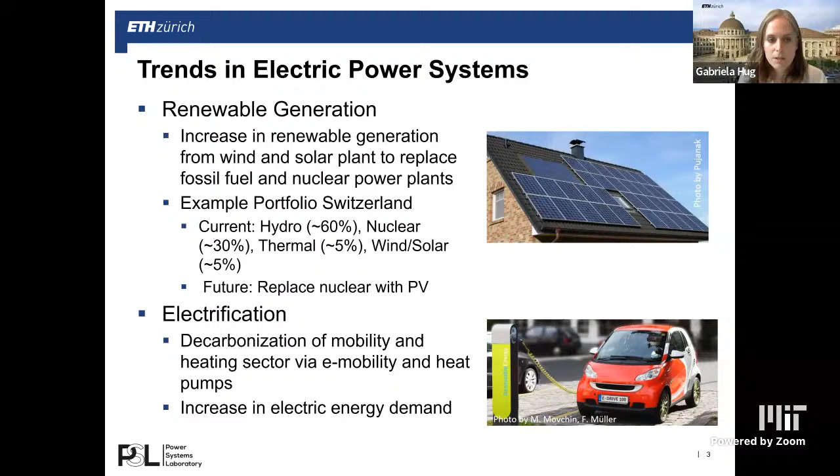Now, in terms of the characteristics of inverter-based resources, well, we're used to synchronous generators, and they have some natural physical coupling with the system due to the fact that they're rotating. Whenever we see an imbalance in load and generation, at the very initial moment, that difference is covered by the kinetic energy, and that has some impact on the frequency. So we see this inertial response, and control loops are used to replace the inertial response.

Whereas in inverter-based resources, we don't have that actual natural coupling with the grid anymore, but this is via power electronics. This has the disadvantage that we don't have this natural coupling, which helps to reduce the speed of the system dynamics. So it's actually a drawback.

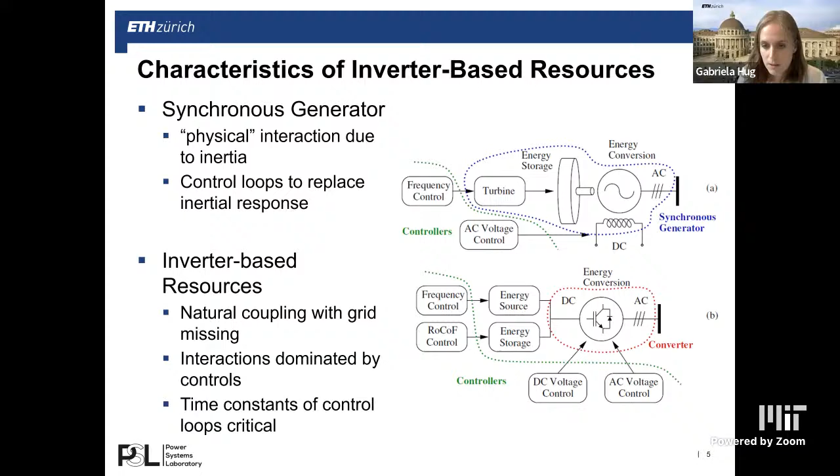On the other hand, inverters can also be controlled more freely, so we have a higher degree of freedom, and therefore can also design the controls a bit differently. So the interactions in that case are dominated by the controls. And in that case, actually time constants of the control loops and how they're designed becomes critical, but the time constants are not going to be the focus of this talk.

In terms of system reaction, if we decrease the inertia, which is reflected in M—and here I'm talking about the natural inertia, not imposing any specific controls for the inverters—then we do expect to see an increase in the rate of change of frequency, so faster system dynamics, and also an increase in the nadir, which is the minimum or maximum frequency deviation.

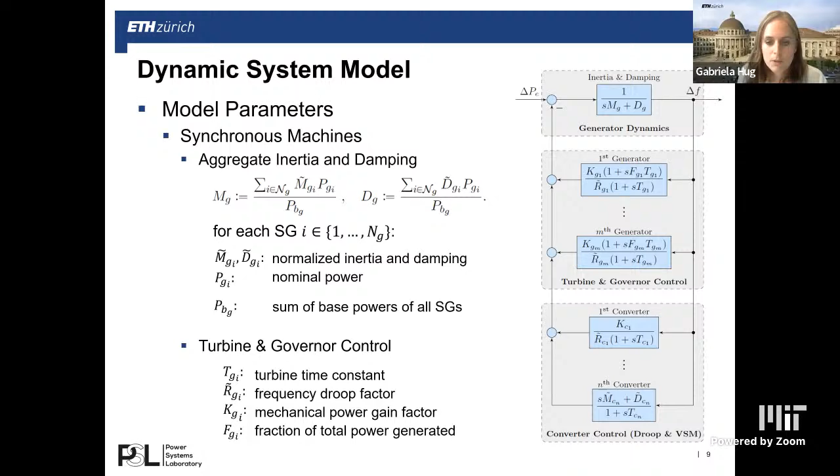Now, if we're adding converters to the system, we can distinguish between the ones that actually have an impact on frequency, or grid forming converters, versus just grid following. The ones that are grid forming, we're looking at droop and virtual synchronous machine control.

So droop is a standard droop control, and VSM corresponds to enabling or using the power electronics in a way that we control it so that it behaves similar to a synchronous machine. And that's what we have on the bottom.

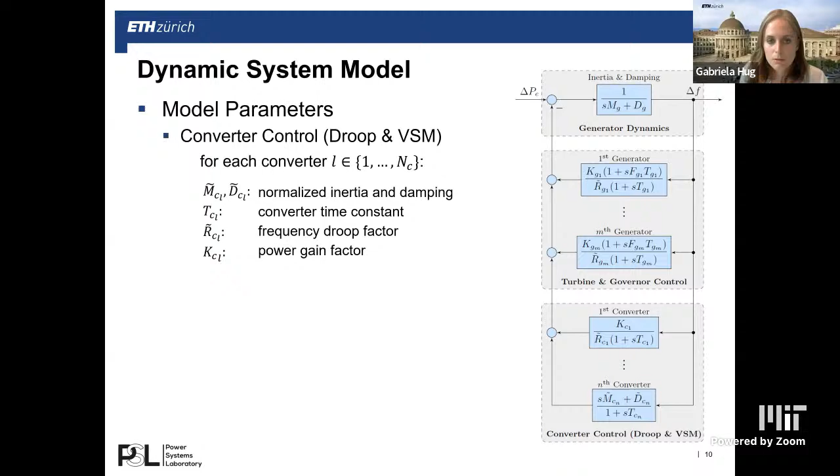So we have converters that have droop control, where we have some gain factor, speed droop, and the time constants of the converter. And other converters include those which are controlled via virtual synchronous machine approaches.

Now, having this entire model, what we can do is derive a general transfer function. I'm not going to go through the details here, but we can basically add up all of these terms and then get a relationship between the frequency and any imbalance in the system.

In order to simplify this transfer function, we're going to assume that the generators all have a similar time constant, so we set TGI equal to T. We also assume that the time constants for the generators are significantly larger than for the converters, so we set TC equal to 0. Doing that, we can derive this function you're seeing here in red as the transfer function.

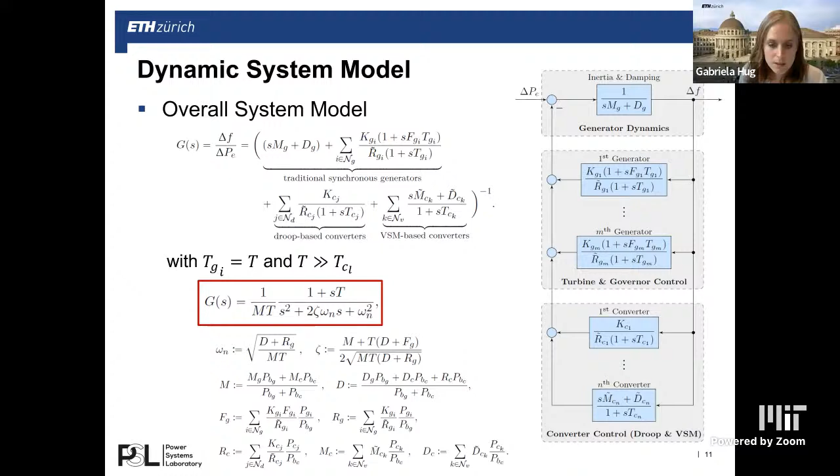We're using that in the following to derive some constraints. It's not for the purpose of simulating the actual system and running simulations. What's becoming clear from all of these terms defined here is that the inertia constants, the damping factors, and all of the parameters I was showing before have some impact on the behavior of the system, and we can influence it by choosing the control parameters.

So we will leverage this function now for deriving a function that gives us, in the time domain, the frequency evolution given a certain step function in terms of power imbalance. That's what we have at the top here, again without providing too many details.

Having this function now as a function of time, given a certain step in delta P electric, we can also derive the frequency nadir. How are we doing this? Well, we can take the derivative of this very first function, set it equal to 0, and identify at which time instances t that derivative is equal to 0. That tells us when we reach the minimum or maximum value.

We have multiple ones because we have an oscillating system, so we have more extrema. The first one would then be the frequency nadir, and we can plug that into this function. With that, we have maybe a somewhat complicated expression for the frequency nadir, but we have an analytic expression.

In terms of RoCoF, what we can model it as is taking the derivative again of this function, and then plugging t equal to 0 in, because that's when we're going to see the maximum rate of change of frequency. And then we can also derive the steady state frequency deviation.

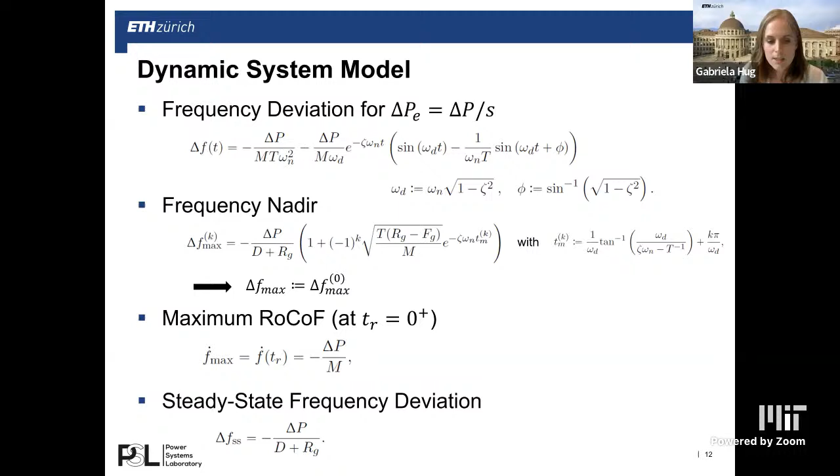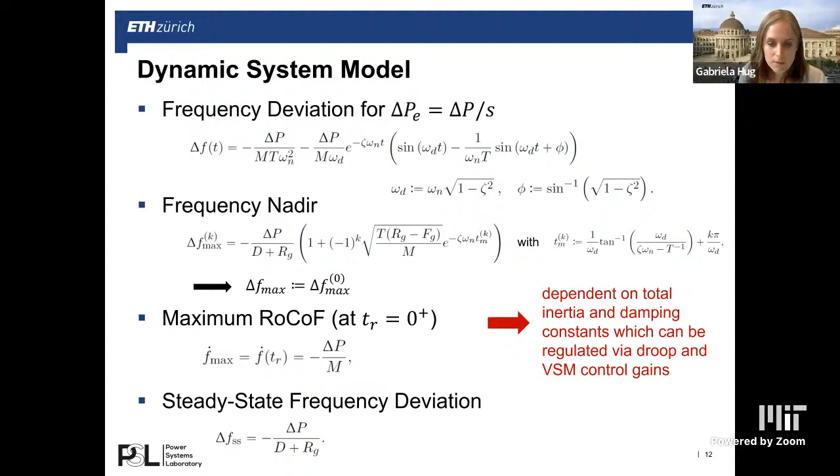So we now have these equations, and what becomes clear looking at these expressions is that it's dependent on the total inertia and damping constants, which can be regulated or influenced via the droop and the VSM control gains. Having now introduced these equations, which I will come back to a little bit later, we can now look at unit commitment in low inertia systems.

The point that I want to make with this part of the work is that we can include constraints on frequency measures, and other people have also been working on this. How can we include frequency constraints in the unit commitment problem?

Why is this important? Because if we do have an increased level of inverter-based resources in the system, then we need to make sure that we still have an acceptable frequency in the system, in terms of limiting the RoCoF, the nadir, and the steady state frequency deviation, given a specific step change.

So we have these functions that I've been using or deriving previously, and what we now want to do is include that in a unit commitment problem. Now, introducing these adds quite a lot of complexity.

So what we can do to simplify the frequency nadir equation is use a so-called bound extraction mechanism, which transforms the first constraint into simplified limitations on the different parameters that we have in the system.

How we do this is we're just running all possible combinations in terms of unit commitment after a particular generation outage, and then identify for which combinations the nadir is violated. From that, we can identify these limitations, so we include these constraints in a unit commitment problem.

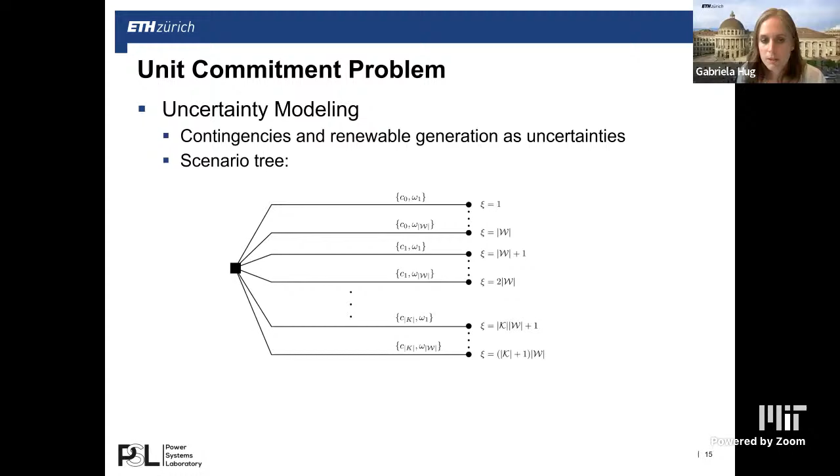Uncertainties come from contingencies, so generation outages—we're excluding line outages—and renewable generation as uncertainties. We're modeling this with a scenario tree, and each scenario has a specific contingency and a specific scenario of wind power output, could also be solar, but here it's wind power. I'm not going to talk about how we decide on these wind scenarios; you can use reduction techniques to get representative wind scenarios.

So how do we do the problem formulation? The objective function includes minimization of day-ahead energy and real-time balancing cost. Day-ahead energy costs include startup cost, shutdown cost of generators, the actual power output cost, and for each scenario, the required reserves needed to balance the system. In the worst case, we have some load shedding.

The constraints are the nodal power balance, including the deviations for each scenario—so a power balance for each of the scenarios—line flow constraints, ramping constraints, power limits, startup and shutdown constraints, and minimum online and offline times for the synchronous generators. Then as an additional part, limits on RoCoF, frequency nadir, and steady state frequency deviation, reflecting the frequency nadir with specific limits on the overall parameters of the system.

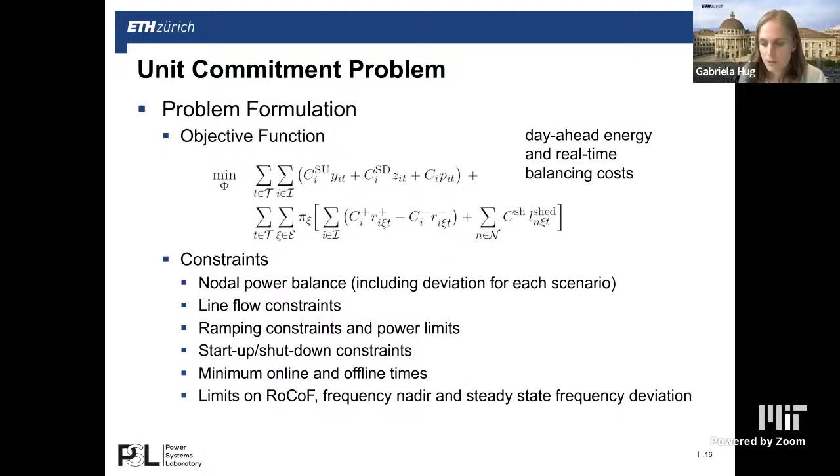We can look at some simulations. We've been working with a modified RTS 96 bus system, specifically looking at contingencies, namely failures of generators at 4 different—I think it was actually 5 different buses, I think I forgot one—looking at these types of contingencies at a particular hour.

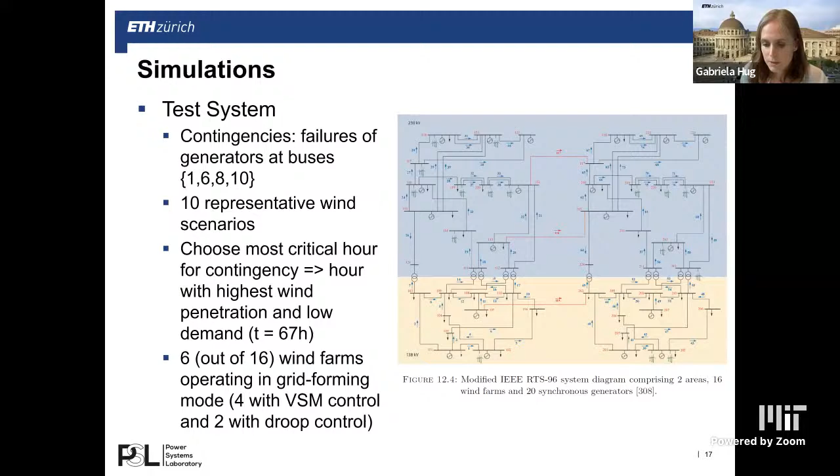We're assuming we're taking into account the worst case, which is the highest wind penetration and low demand in our system—we'll see that at hour 67. We have 10 representative wind scenarios, which multiplies with the number of contingencies to get the overall scenario count. 6 out of the total 16 wind farms are assumed to operate in grid forming mode, 4 with virtual synchronous machine control and 2 with droop control. The parameters are tuned and given in the unit commitment problem.

So let's look at the results. What you're seeing here is the output from the optimization problem, the power output: first in black, the load; in blue, the wind generation; in yellow, the output from the synchronous machines without including the frequency constraints; and in red, including the frequency constraints.

In terms of total generation output from the synchronous machines, there's not too much difference—actually we don't see much difference except where it's zoomed in. That difference in generation output is made up by curtailment from wind generation, which isn't shown in this figure. However, if you look at which generation resources are committed and how many, and what they're producing, that changes significantly whether we include the frequency constraints or not.

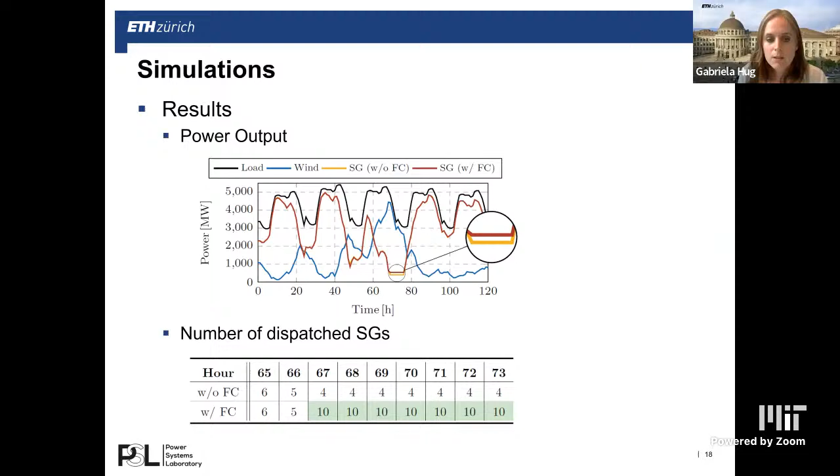On the bottom, you see the number of dispatched synchronous generators, which for this simple system changes significantly. With frequency constraints, we have many more units committed that all have to operate at their minimum power output, and the other generators have to scale down a bit in terms of power output to compensate. But they are really just present to make sure that if one of these contingencies happens at hour 67, the frequency constraints can be fulfilled.

We can now look at what that looks like if we indeed have a disturbance—can't remember which outage it actually is, one of these generator outages—and what happens depending on the committed units. We can see that with the frequency constraint, we're keeping the nadir as well as RoCoF limited compared to if we do not include the frequency constraints.

We can also look at the costs, evaluating and showing it for day 3, because the first 2 days there's quite a lot of startup and shutdown costs since the system first needs to initialize. Looking at the costs on day 3, where we also include these contingencies, we see a significant increase in costs, particularly in percentage terms of the startup cost, because we need to start up more units, and also in terms of the reserves needed to keep the frequencies within the limitations.

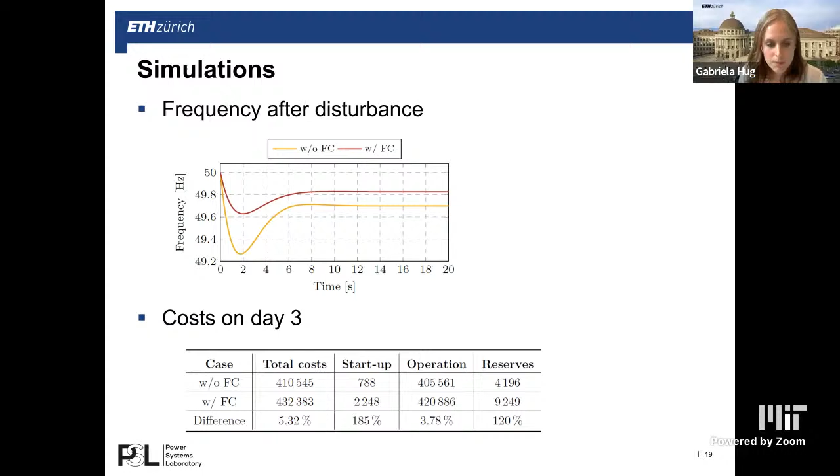So this is just a toy system, and I think it's food for thought about what it means if we also have to take into account that the frequency behavior changes significantly if we have more inverter-based resources in the system. So with that, I'm coming to the second part.

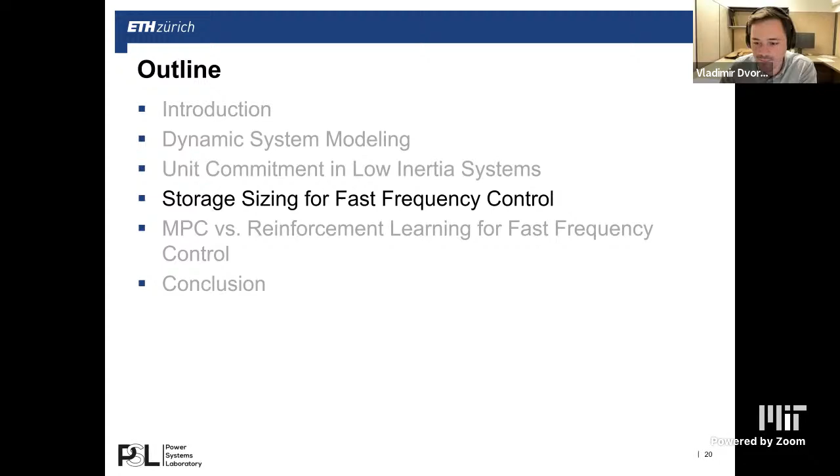Now, the second topic focuses on storage sizing for fast frequency control. The problem statement here is that we can use batteries for fast frequency control. However, they have limitations on power as well as energy capacity. Usually one assumes, well, I have a specific battery with specific power and energy capacity, and then I look at how do I do the controls for that battery.

What we want to do in this project, which was actually a master's thesis project advised by a PhD student, is to compute the minimum storage capacity sufficient for providing adequate frequency support in low inertia systems. So we're including constraints on the frequency to determine what is the minimum power and energy capacity that need to be put in place for the storage.

Now, the storage is interfaced to the grid through a fully controllable VSC, and we're assuming that we're employing a virtual synchronous machine control scheme. So when we're doing the optimization for the design of the storage device, we also include the VSM parameters as optimization variables. We're determining the M and the D, virtual inertia and virtual damping of the virtual synchronous machine scheme. We also assume that the storage device has a given power to energy ratio, eta.

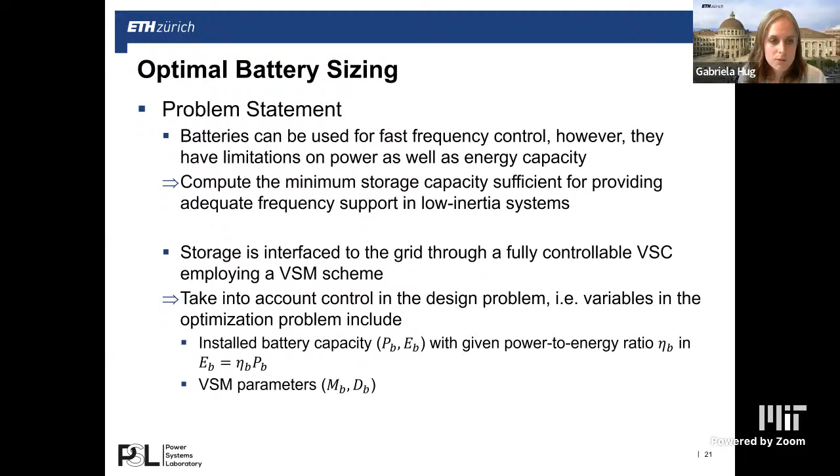So we only need to determine one of these, and then the other one is given, but of course both show up in the optimization problem.

Now, just as a reminder and some preliminaries, we work with these equations that I've been showing earlier to include them in the optimization problem. What we're seeing from these constraints is that they are dependent on the aggregate damping and inertia, and we have impact on this via the tuning of the storage device.

So if we're looking at the system, what could happen is if we end up with an overdamped system, then we end up with omega D that is complex, and then having a time which is complex. So that doesn't really make sense. So we're going to make the assumption that we want to have an underdamped situation, so that Tm is greater than 0 and omega D is a real value, so that we actually do have a frequency nadir that we can compute.

So we enforce that the overall system damping, zeta, is smaller than 1, and we have an expression for that from one of the earlier slides, and that the time instance of the nadir has to be greater than 0. From this, without giving full details, from each of these constraints, we can derive a specific constraint on the aggregate damping D as a function of the aggregate inertia M. So we end up with expressions like this: the Tm greater than 0 leads to a lower bound, and zeta to an upper bound.

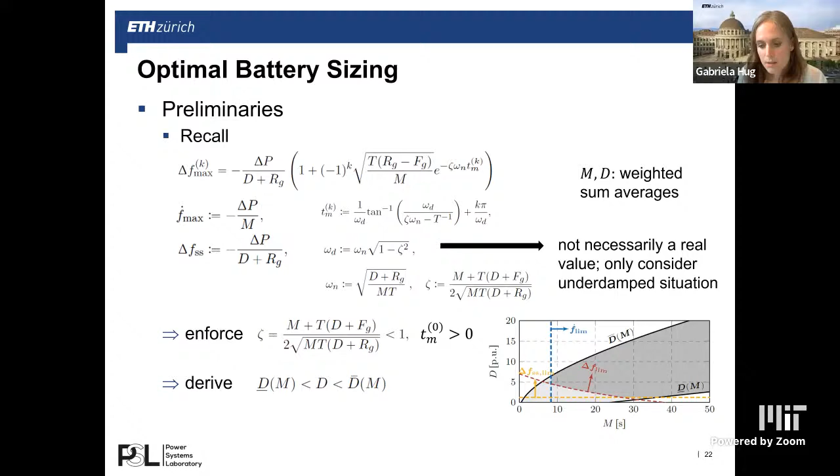So then let's look at the optimization problem. I want to minimize the required storage, minimizing the cost of the storage. I have constraints on the frequency as a function of system parameters and disturbance. So what you see on the left, delta F max, is actually a function of the system parameters and the disturbance, as I was showing on the previous slide.

Then additionally, I include these limitations here to ensure that we do have valid values for D and M. Then I have some non-negativity constraints, such as that M, which is a tuning parameter — the virtual inertia of the battery — is greater than 0. And then I also have some power constraint on the battery. This is derived from the virtual swing equation, because we're operating the storage as a virtual synchronous machine.

So we have some limitations on the power, which gives us the minimum amount of power capacity that we need. And then also an energy constraint, so we integrate this power over time until steady state, and that gives us the energy value. As I said, we're enforcing a fixed relationship between the energy and the power, and we can vary this eta value for sensitivity analysis.

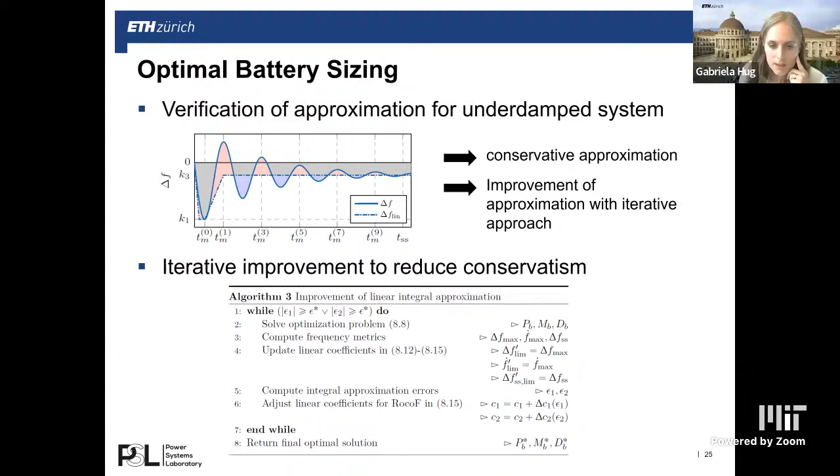And we can do this in an iterative way. So then let's look at some simulations.

We have a test system with one synchronous generator and five converters, assuming grid-following mode. The only grid-forming is from the storage device, placed with one of the inverters. The inputs are the maximum disturbance we expect, the power-to-energy ratio, and the speed droop of the one synchronous machine.

Again, this is a toy system just to understand the relationships and the implications of the different assumptions. There's quite a lot of results shown in this graph here. I am not going to go into details.

What I want to illustrate is that the inputs heavily impact the nature of the problem. So if we look at the maximum power, what is the maximum disturbance, what is the speed droop of the synchronous machine in the system, that can lead to a problem that is too relaxed, so the synchronous machine can basically do the job, or a problem which is infeasible, or different constraints become binding.

This figure shows when which constraint becomes binding. Again, the main point here is really that the inputs heavily impact the nature of the problem, therefore also the solution.

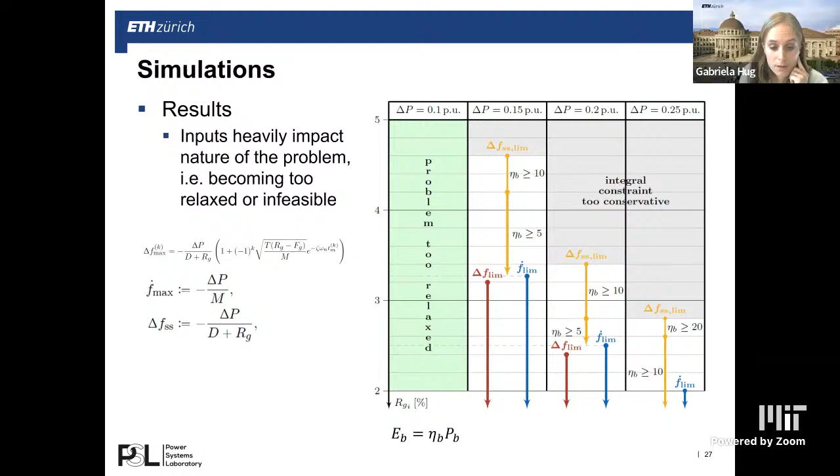Then let's look at the specific case, namely delta P of 620 megawatts, which is of course a large change, but again, we just want to study the implications of the result from the optimization problem.

We're assuming two different speed droop values, 2.6% and 4.6%. And then what we run the simulation with is without the iterative improvement, where we have some inaccuracies in the estimation of the energy content, and with the iterative improvement.

What you see here are the inputs. So eta is the input, and the speed droops are an input. What we can see is that for R equal to 4.6%, there's a noticeable threshold in eta after which the additional energy capacity does not contribute anything anymore. So it's really the P which is becoming the binding term.

And in fact, because we're talking about fast frequency control, only very limited energy is in fact needed. So what I also want to point out is if we use the iterative improvement, going from the left to the right-hand side, particularly in the case of 4.6% for the speed droop, we see a clear difference.

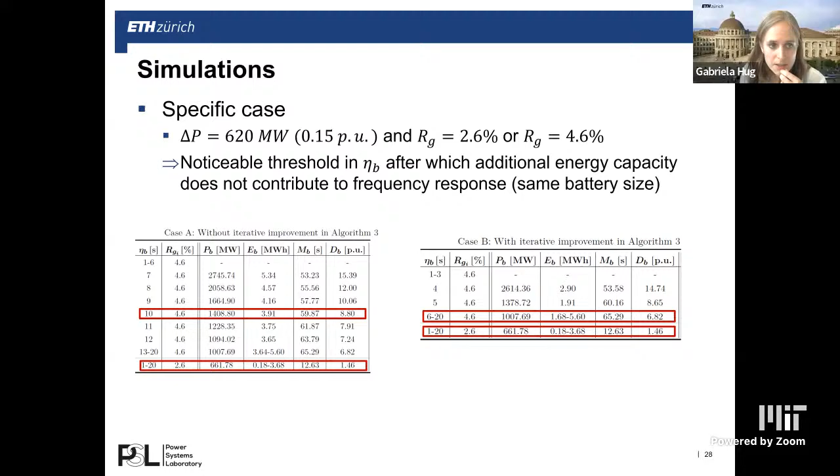Specifically, we look at a scenario where we have the speed droop equal to 4.6%, eta being 10 seconds. Again, we're talking about very small storage amounts. And then the R equal to 2.6% and eta equal to 15 seconds. The results are shown on the right-hand side.

So in the first scenario, if we look at the frequency behavior over time, we see that the integral approximation is very conservative because the limiting factor in this case is the steady state frequency constraint.

Whereas in the second scenario, which is the one with R equal to 2.6%, the nadir and RoCoF impose tight constraints, and the integral approximation is in that case less conservative, and we don't need the iterative approach to improve the storage sizing.

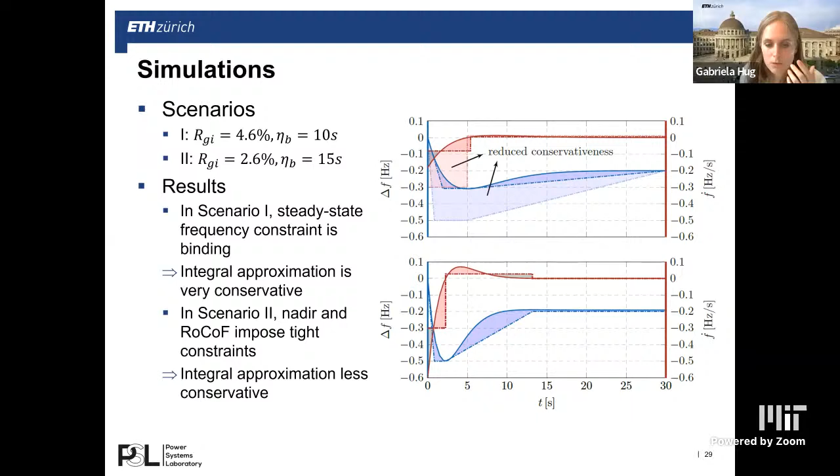So with that, I'm already coming to the last part, which is switching gears a little bit into a different time scale. We're still talking about fast frequency control, but now really looking at how we could do the control design for fast frequency control.

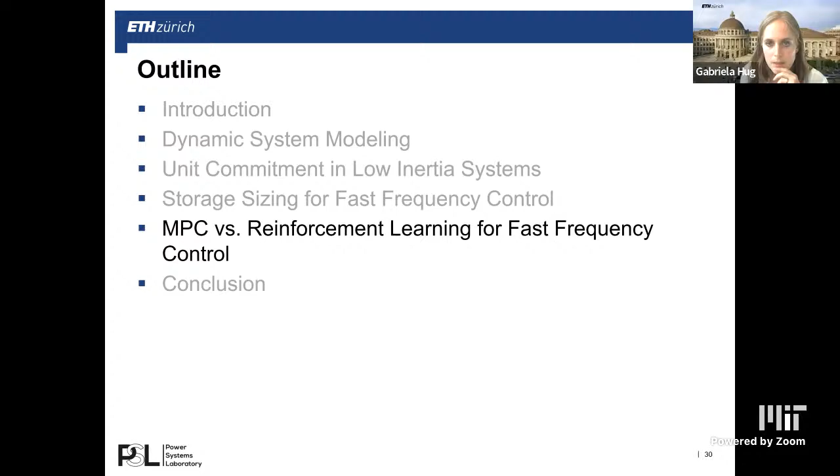So what do I mean with fast frequency control or fast frequency reserves? Well, we know that initially we're going to have the inertial response from the synchronous machines. And then once we have some frequency deviation, primary frequency control kicks in.

But before that, we could have fast frequency control given from some inverter-based resources because they're capable of acting very quickly. And we now want to use grid-forming inverter-based resources for such fast frequency reserves, but we want to only use it in emergency cases. I will show in a minute what I mean with this, or how we're setting it up.

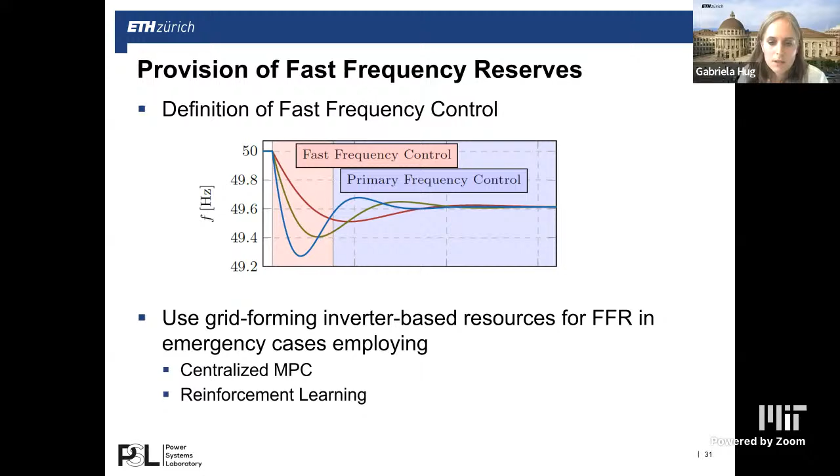We're going to compare two different cases: a centralized model predictive control approach and a reinforcement learning approach. In order to do the reinforcement learning, we need a model, and I'm getting to the training model a little bit later, but I first want to explain the control layers that we're going to assume.

We're going to assume a centralized controller with a single agent control structure for emergency activation. We have a number of VSC units that participate in the fast frequency control provision. We assume bidirectional communication to each VSC and unidirectional communication lines for each synchronous generator, with optical fiber delay below 100 milliseconds. So we're just going to look at what we can achieve in this setup—of course that's not how the infrastructure looks like now, but what we could achieve with this.

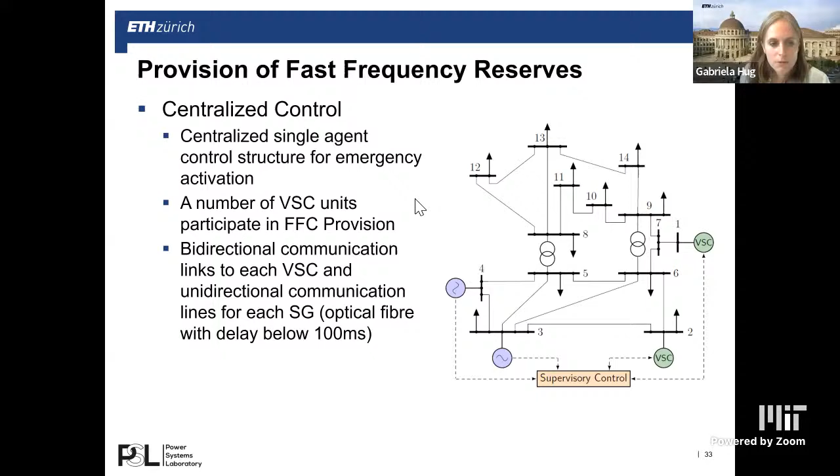Now let's come to the learning-based approach. I'm not going to get into the specifics of how the learning approach works, but in general what we need is a model of the agent-environment interaction. We have decision variables, which are the adjustments for the power settings for the converter, and as input we have the frequencies and the derivative of the frequencies—using, I think, 3 time steps in the past, looking at the averaged derivative for the frequency at the different nodes in the system.

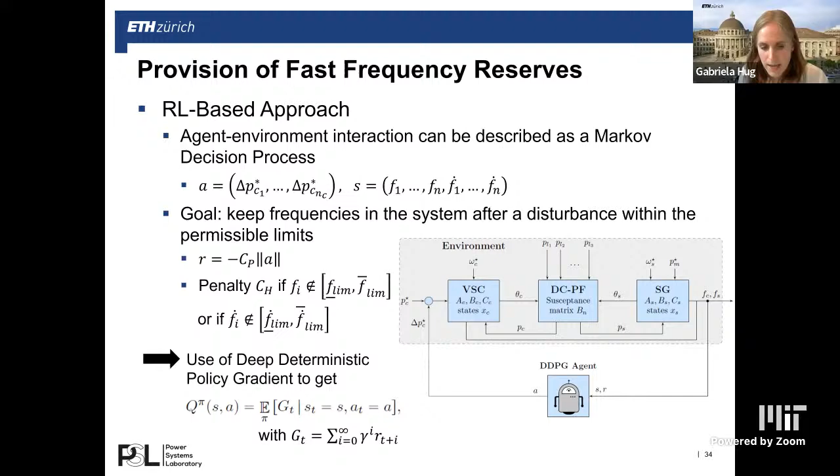The goal is to keep the frequency in the system after disturbance within permissible limits, but also make sure we don't enforce too much of a reaction on the inverters. So we want to minimize that, and we put a penalty onto this reward function—added if the frequency violates the frequency limitations, or if it violates the derivative limitations. We're using a deep deterministic policy gradient to get the model for the Q function, which tells us the expected reward over time given a certain state and a certain decision or action in the system. So that's the overall setup.

We need a training environment for the learning-based approach. Here we're using a second-order VSC model, which includes the active power controller dynamics, and a third-order synchronous machine model. Again, this is the model that we're using just for the training environment. Afterwards, for the simulations, it's a significantly higher order model with which we demonstrate the performance. The grid model is a DC power flow model, and with this you get the overall system down here.

We have the VSC, which has a speed droop control, and the system model with the DC power flow and the synchronous machines. We can derive for this the state space representation, and then use that as the training environment. We want to get the relationship between what decisions or adjustments in the set points for the converters should be made given a certain disturbance in the system.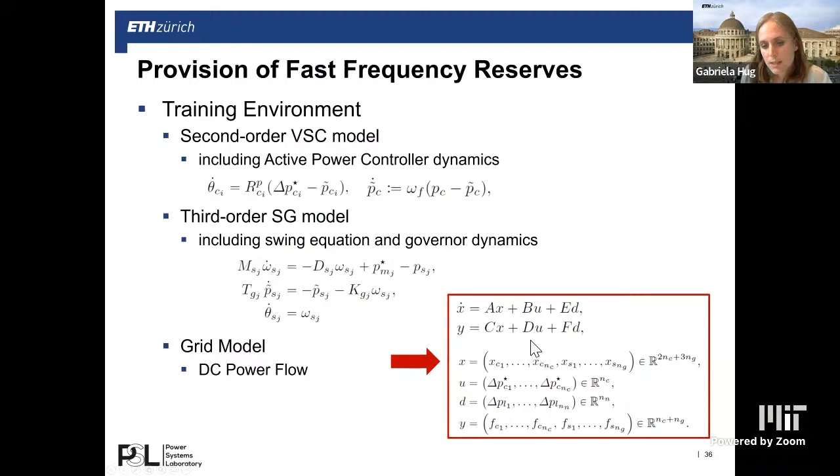Before talking about how the training works, or the test case, let me give you the equivalent MPC formulation—that's on the right-hand side. We can leverage the same model I was just showing to write down this MPC formulation. This gives us the dynamics, and we want to make sure the frequency stays within the limits, while we minimize the reaction required from the adjustments in the converters.

The optimization problem is solved at each time step, set to 250 milliseconds, and then actions are applied. Because we need predictions for the power output, we basically assume that the power output change, or the load disturbance, stays constant over the horizon.

So that's actually the input. In this MPC approach, this is really just used as a benchmark, we assume that we have delta P measurements at every single node. In the reinforcement learning approach, we don't need these measurements. Then we have the power output set points as inputs, and the measured frequency also as inputs to the MPC formulation. As outputs, we have the set point change for every converter, delta Pi.

Let's look now at the comparison between the reinforcement learning approach and the MPC approach. We're using a test case of the IEEE 14 bus test system. We have two VSCs that participate in fast frequency control. We use a high fidelity DAE model for the time domain simulation, and we want to keep the frequency between a threshold of 0.5 Hertz and the rate-of-change-of-frequency threshold of plus minus 1 Hertz per second.

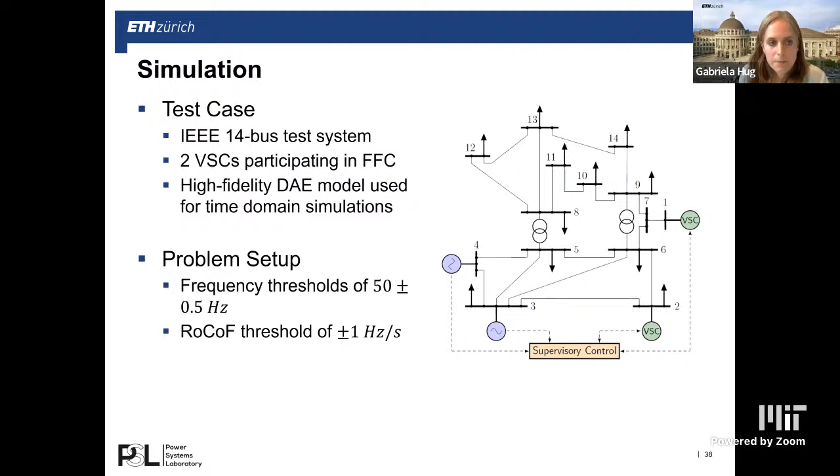Now, first we need to do the training for the learning-based approach. How that works is we introduce random step disturbances. Step disturbances correspond to delta P values, changes in the load or the generators at a particular location. Each episode corresponds to one of these changes in the disturbances. For each episode, we test different actions and then learn what is the result in terms of frequency, and basically learn from this.

Explaining this in a somewhat simplistic way, the learning process we're seeing on the right is actually converging for the different parts, the reward function, the loss function. The reason I added this figure is that at episode 10,000, we're also testing whether it will be able to adapt to changes in the environment. What happens here is some of the inertia constants of the machines are changed, which changes the overall environment, but it adapts rather quickly to such a change.

Now the first step in the simulation is to do some testing of the agent, to see if it's able to adhere to the frequency limitations. So we add an 800 megawatt disturbance at one of the nodes and then see what happens in the system. On the right-hand side you're seeing the frequency, the derivative of the frequency, and the steps enforced at the converters via the supervisory controller. It realizes that it will violate the frequency constraints if there's no reaction from the converters, and one can see that we keep the frequency and its derivative within the given limits.

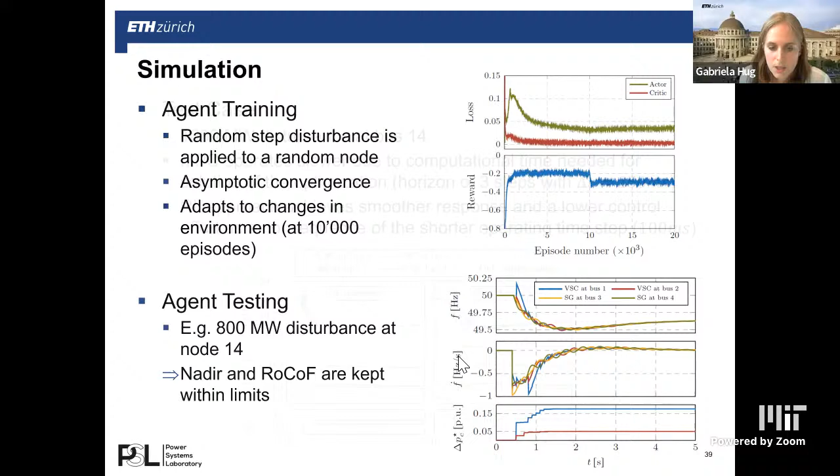And what we also see is that we have some oscillations in the delta P. The dashed curve is again only droop control, and the dashed curve plus these controls give us the curves at the top. So you can see that we have a smoother response for the RL approach.

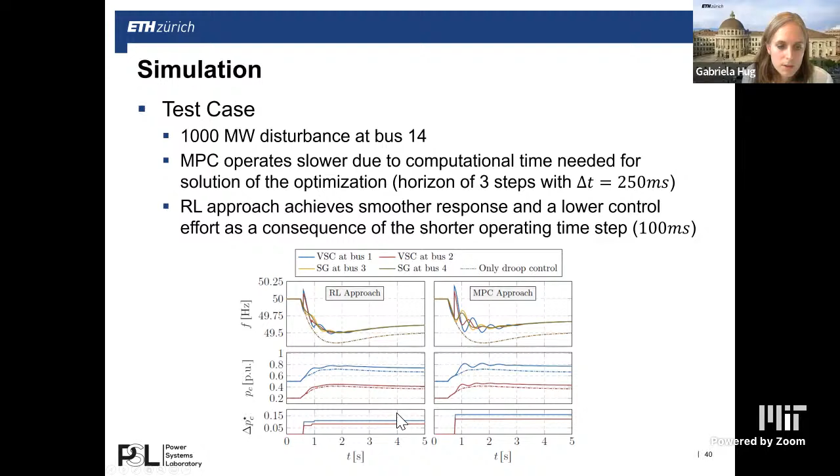With that, I'm coming to the end. So I was showing you 3 different optimization-based problems, some of it really with the idea of showing you what are the implications of having more inverters in the system.

Overall, we can say that the characteristics, including the dynamics of the power system, are changing due to the ongoing energy transition. Inverter-based systems do offer new control capabilities, but of course also have some negative effects. They are the cause for faster system dynamics. Then availability of natural and virtual inertia will likely have to be considered in the unit commitment, and also the control capabilities. Storage is suitable for fast frequency control.

In fact, we ended up with having small energy amounts that we need, even though we need to define this capacity and also the power in correlation with the control settings for these devices. So they need to be defined such that sufficient energy is available and sufficient power capacity is available.

And finally, the variety of control mechanisms for fast frequency reserves provision by inverter-based resources are possible. I was really just showing two. There's a bunch of people working on this as well, proposing different ways of enabling these.

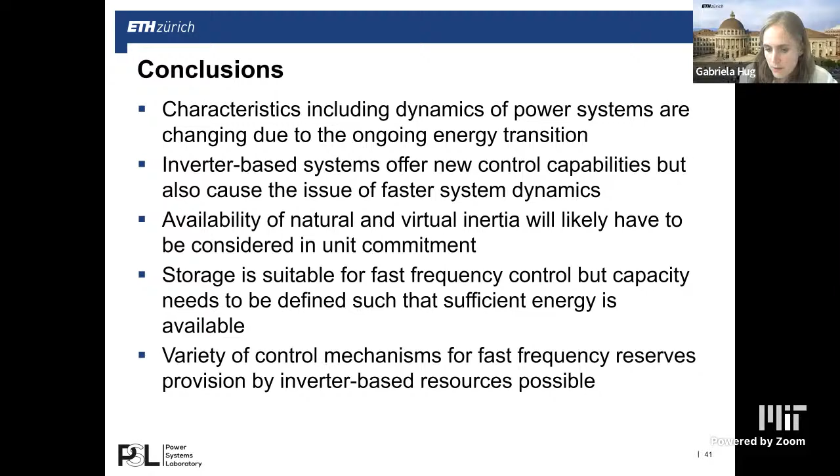And then finally, the references where you do find the work that I was just presenting. Again, thanks to all of the co-authors and particularly the students who did all of the work that I had the pleasure to present today. So with that, I hope I wasn't overrunning you with too many topics, and I'm open for questions.

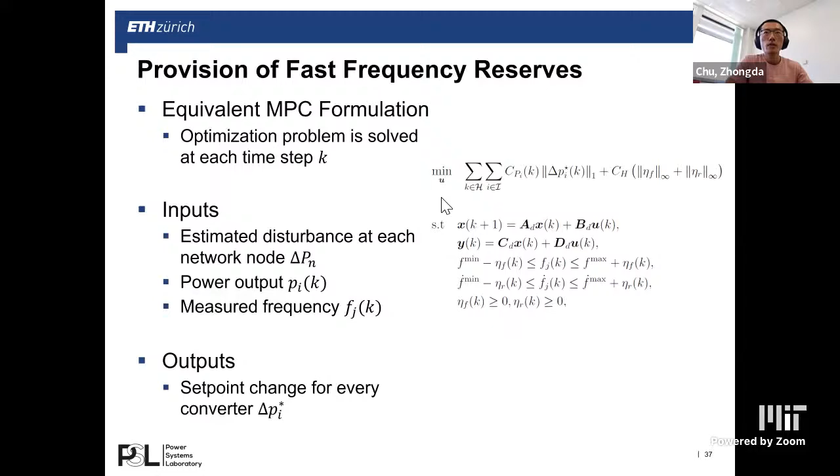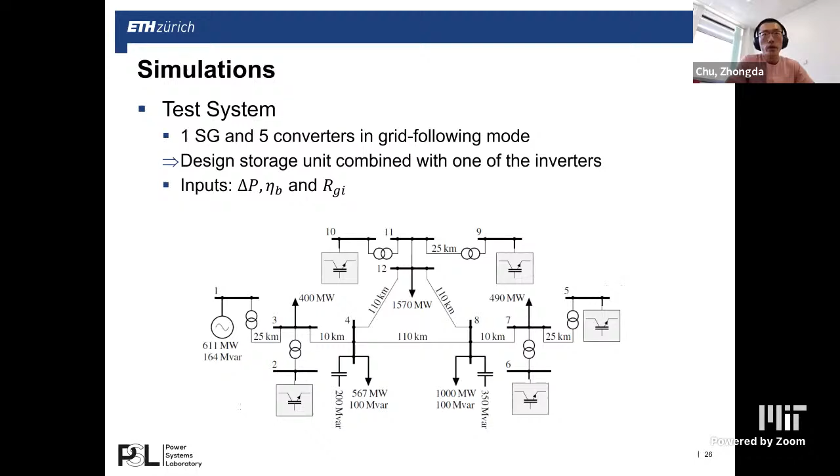Yeah, but I just wonder, would this be a little more conservative? Now I see your point. Yeah, that's correct. Yes, you're right, it is a conservative approximation. Even the fact that we're using this triangular approximation is an approximation. So yes, in general, both constraints are conservative constraints. We want to make sure that we do have enough capacity. You of course shouldn't be over conservative, and that's what we're showing in the time domain simulations.

Okay, and another question for the reinforcement learning based approach. So here I'm wondering, since the RL is a kind of non-parametric controller, I'm wondering why do you still preserve the droop structure when designing the reinforcement learning control? I'm not sure I understand, maybe can you go back to the first page?

Well, what we're doing is we're determining a set point in general, and we're adjusting that set point. But the goal is not to interfere with it if not necessary. So we keep the speed droop, and therefore the adjustment or impact of the supervisory controller is achieved by adjusting the set point for the speed droop.